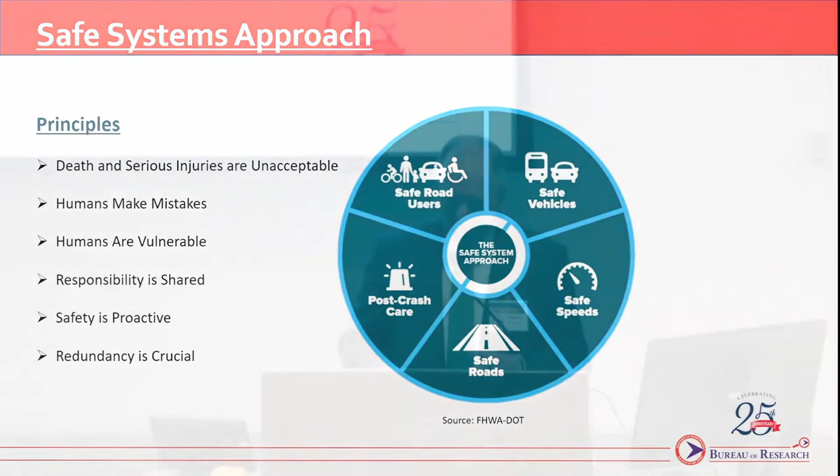So we can't just take one little segment of the pie and think that we're done. We need to work with other partners, and I think there's going to be some additional work going on with Dr. Curry. There's other work, and you'll see this as we proceed, how in safety we are not just sticking to the infrastructure side. There are now 5 E's that we have in safety: the traditional engineering side, education, enforcement, emergency response, and the 5th E is equity. So this is really, we have to look at all of these as we move forward with safety.

So the next piece here is I want to talk a little bit about how our federal highway safety improvement program has evolved to meet our challenges. So if we go back 10, 15 years ago, we were having some difficulty in authorizing enough of the HSIP money. What we've been able to do over the past few years is to really increase the diversity of the categories of the projects that we look at.

We are no longer just doing single hotspot projects. We have begun to look at systemic and systematic projects where we can use our data to identify multiple areas, multiple locations that share the same characteristics and apply similar treatments to them.

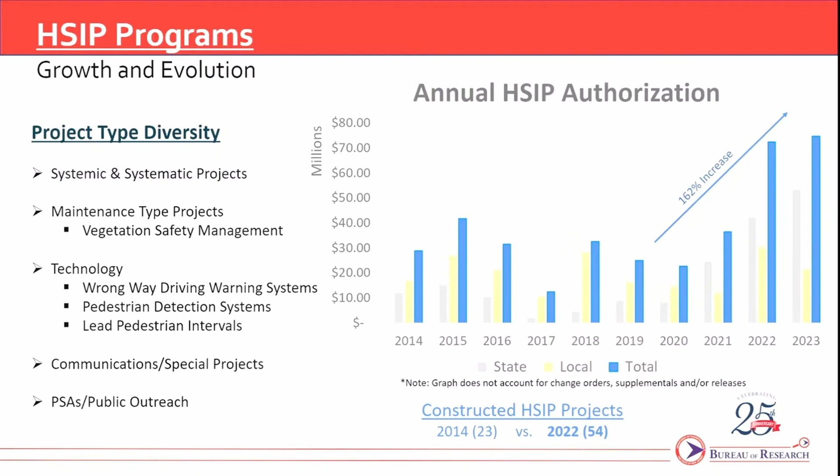In terms of systematic and systemic projects, we're spending more time on these because it's a more proactive approach. On the systematic side, we're doing centerline rumble strips, vegetation safety management, and also looking at mid-block crosswalk improvements. Every approved mid-block crosswalk, we're looking to make improvements there.

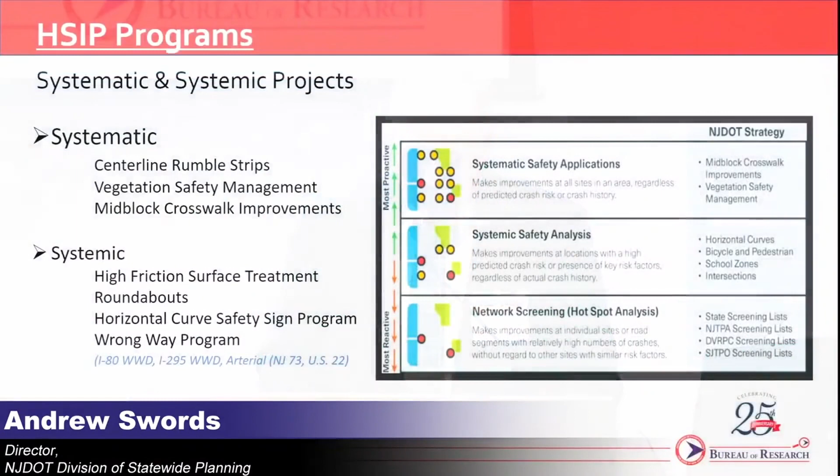In addition, on the systemic side, there's high friction surface treatment, which is very helpful. Roundabouts are one of the proven safety countermeasures from Federal Highway. We have a horizontal curve safety sign program and a wrong-way program. So again, we're moving beyond just solving hotspot problems at specific locations. We still do that, but we also have to move beyond that into systemic and systematic improvements.

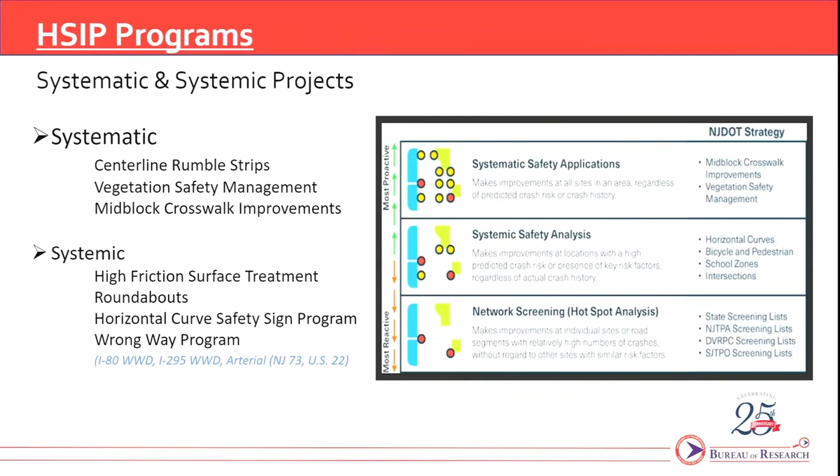I want to talk a little about our focus areas moving forward, because one thing we learned in safety is we cannot rest on our laurels. Even if the signs show we're getting better, we cannot count on that continuing without a comprehensive, thorough, and committed approach to move forward.

In addition, protecting vulnerable users is a key feature of our work. It was anyway, but now we're also doing a vulnerable road user assessment that we're providing to Federal Highway, and that's going to be a cornerstone of our work moving forward.

Our ongoing work with partners is critical. This came up at the Safety Summit yesterday, and it will be everything we do with partners at the federal level, the state side, our metropolitan planning organizations, and our transportation management associations, the TMAs. They're boots on the ground for Safe Routes to School and a lot of other work. Also, the DOT Local Aid Resource Center is really important because it connects to all our counties and municipalities, critical partners since they own a lot of the roadways in New Jersey.

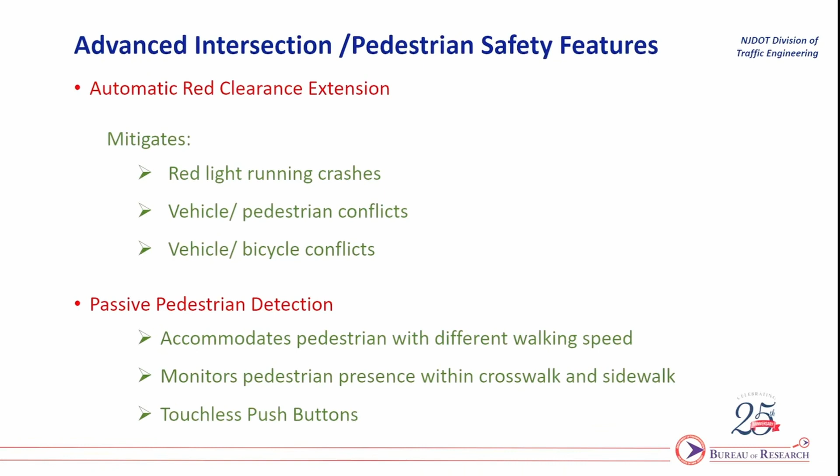The second feature I'll be presenting is passive pedestrian detection. This feature accommodates pedestrians with different walking speeds, and monitors pedestrian presence within crosswalks and sidewalks. I'm pretty sure everyone is aware of the touchless button that was installed during the COVID era.

Before I get into this red light extension feature, it's important to know how severe this issue is across our nation. The statistics from 2021: we had almost 127,000 injuries, and about 1,100 fatalities. That's like 3 fatalities a day. That's a big number.

This is the basic setup for our red clearance, I mean the automatic red clearance extension. What you see in the red zone is the detection area, and what you see in yellow is also an advanced detection area at the intersection.

As we all know, most of our traffic signal crashes occur in this red zone at a signalized intersection. The core issue is why do we have those accidents? We have all the technology in the world at this time, and we're still having 3 fatalities a day.

We took a very different approach. Of course, there is advancement in technology, but we took a little different angle. We believe, along with our engineers, that the core issue is the common arrival time in this red zone. So what this feature engages and does is it changes the arrival of the two conflicting movements during that phase.

Regarding the yellow extension, which we call advanced detection, what it does is use forward-fire radar systems. It picks up the speed of the vehicle and calculates the stopping distance of that vehicle. Once we know the stopping distance is beyond the stop bar or beyond the intersection, we know this vehicle is not going to stop, it will blow the light. This feature delays the side street, which is the conflicting movement, for a few more seconds to let this vehicle cross.

So we prepared two videos in our office that would explain further how this operation works. Let's see.

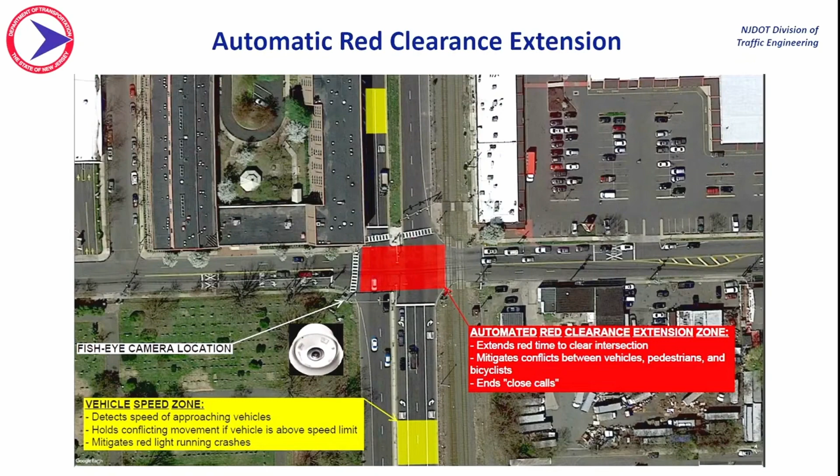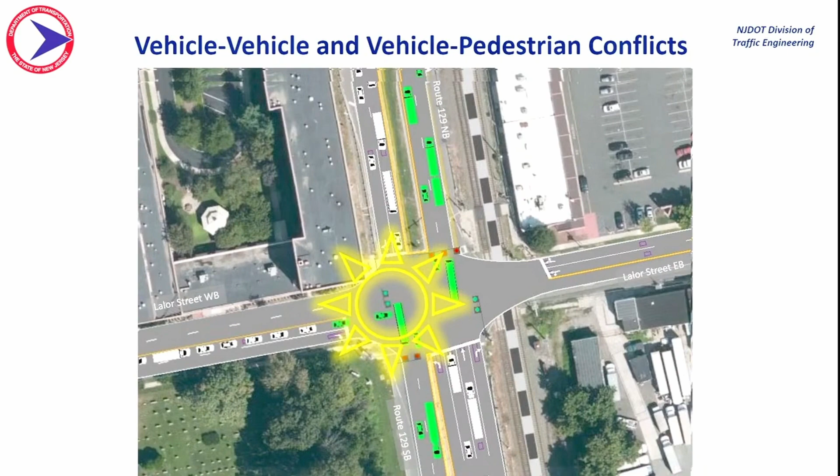Notice the green signal for Route 129 and the red signal for Lalor Street. Traffic is flowing normally along Route 129. Route 129 is about to receive the yellow light. The red light will appear in about 4 seconds.

However, a southbound vehicle is about to run the red light. Follow the arrows that will appear in the upper part of the map.

All approaches see a red signal for a set amount of time, which is normal operation in this instance. Notice the vehicle running the red light. This time, due to the automatic red clearance extension feature, all signals are displaying red until the vehicle has completely cleared the intersection.

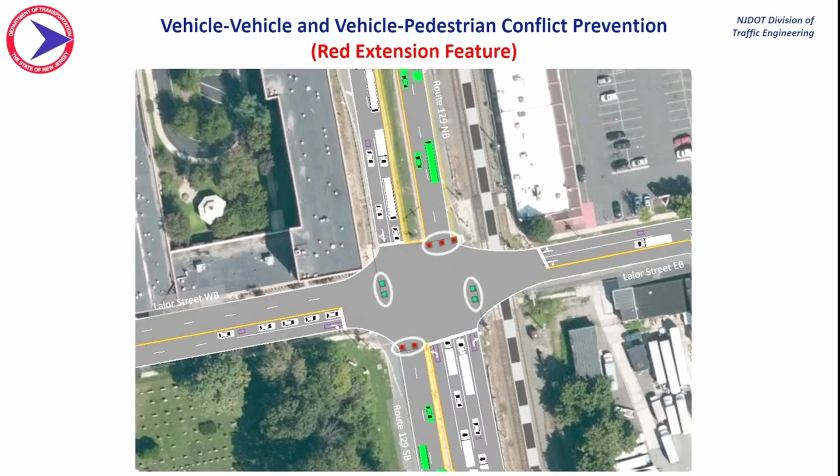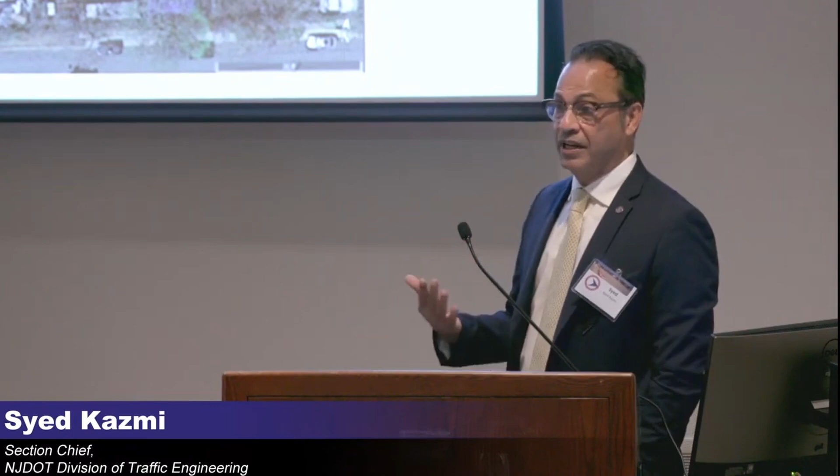So this is the basic operation for the red light running extension feature. And the red zone that you saw also provides a second layer of safety, redundancy. So if there is a vehicle at the end of any permissive phase, or maybe a late arrival at the intersection, or maybe a bicyclist, it can extend or hold conflicting movement for a few more seconds to make sure. The goal here is to clear the box before any conflicting movement.

Okay, this is the second feature that I'm going to present. This is a passive pedestrian detection system. What you see in the purple is the waiting zone. It's all detected by a 360-degree camera, and it detects the pedestrians by direction. It's not like somebody is going away from the intersection. It detects the pedestrian by direction and places the call for it.

A push button at this time is basically redundant. It has no meaning, but we keep the push button in for compliance reasons and also for reassurance, and also if there is any issue with the detection system, buttons are still available. And they are also touchless buttons.

What you see here is Route 129 Lalor Street. What you see in the green is the crosswalk area. This has also been detected. In this zone, in the green zone, we monitor the speed of the pedestrians. For some reason, if the pedestrian cannot finish their journey, it extends time for them.

It holds the conflicting movement for another few seconds. Of course, it's a predetermined time. It's not like someone can stand in the crosswalk forever, but that's a predetermined time, and that can also extend the time for crosswalks, so the conflicting movement won't start.

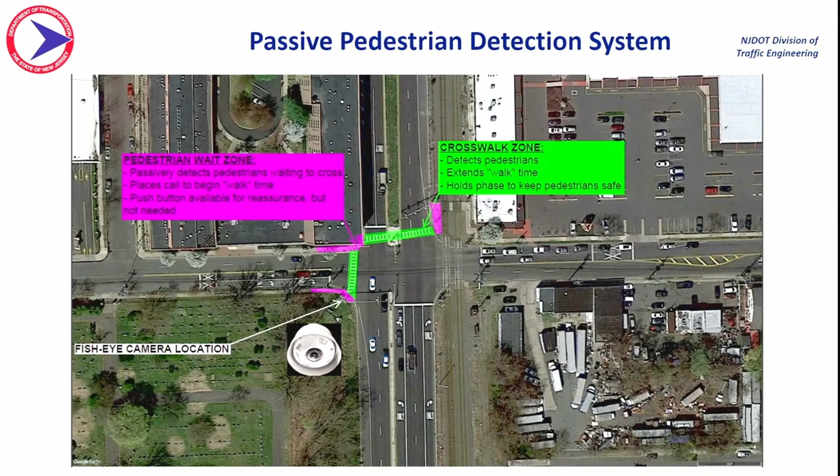We assume that everybody is going to use the push button. We install the push button. We have 3.5 feet per second for every pedestrian in the United States. So what this feature does is it basically compensates for those assumptions.

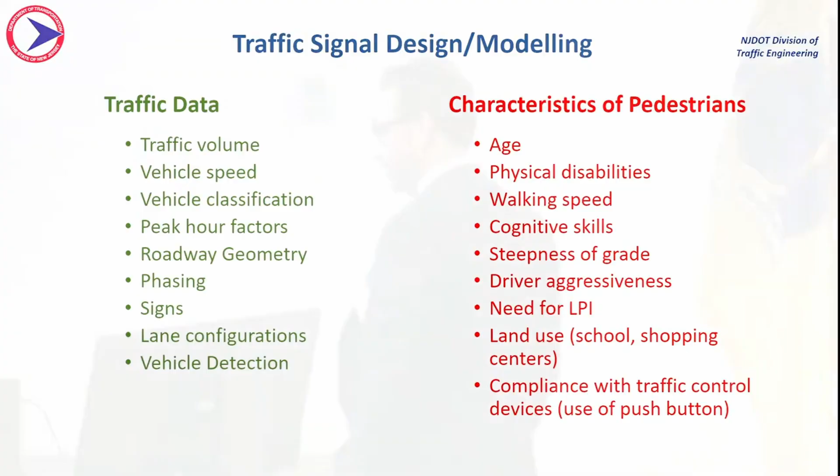When we got onto 129 Lalor Street, we have a senior citizen facility on one side. We have low income housing on one side. We have a light rail on the other side, and we have a lot of retail on the other side. I can walk 6 feet per second, but we have noticed mothers with strollers, 2 feet per second, 1 foot per second, and that's where this feature comes into play.

And in designing a traffic signal, I think these features are so important to be integrated into our traffic signal design. In the last 15 years, we have seen the eruption of all the adaptive systems, and we implemented them all over the United States. The goal for all the adaptive systems was to reduce travel time, having a bigger green bandwidth, and what do you call it?

Okay, so my time is almost over. So give me one more minute. I can take some cards.

So these features are extremely important to be integrated into our systems, and we are also in conversation with a lot of the adaptive vendors to integrate these features into the system. So in the future, you will probably see a lot more of this in traffic signal systems, and we will be incorporating these features. The rest of my speech will probably give you more information.

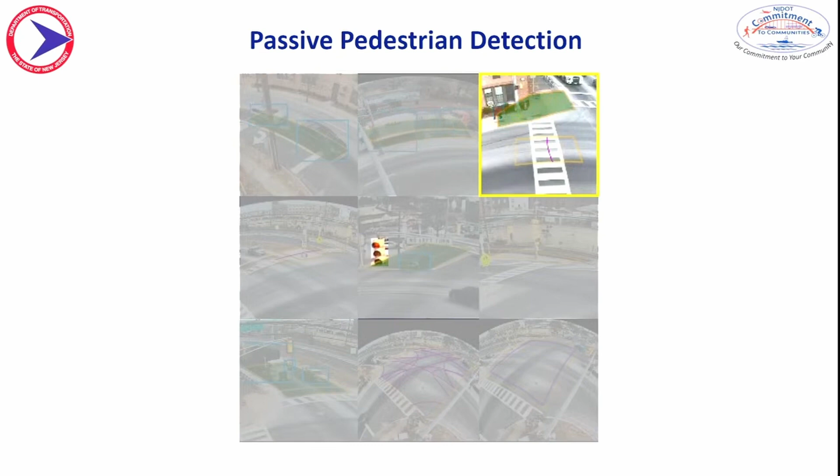There are some areas that operations addresses that affect safety. New Jersey DOT operations consist of the most visible day-to-day operations that the motoring public sees every day. The maintenance crews remove roadway debris, fill potholes, complete minor sign repairs, conduct safety service patrols for broken-down cars on high-speed roadways, and complete mowing operations.

Some of the areas that operations focuses on that really improve safety in the state is winter operations. As you know, winter is approaching. The operations team with private contractors are already prepared, having equipment and material ready and stockpiled to pre-treat roadways during a storm, clear the roadways, and salt the roadways to prevent icing and provide safe travel for the motoring public, even in the worst weather conditions.

The area I'm going to speak further about is the vegetation management program. It's a new program that operations has taken the lead on in coordination with various New Jersey Department of Transportation leads, utilizing HSIP funds that were talked about earlier. The program's intent is to reduce vehicle incidents off the roadway involving trees and vegetation.

Our unit also does priority construction projects. I'm not going to go too much in depth, but you see the types of projects we work on. These are on-call contractors that can report to an incident when it occurs, whether it's involving drainage, bridge, roadway, guide rail and attenuators getting hit, and as little as long-life pavement markings. If an area is requested for improved crosswalks and signage, we can get out there within a couple of days to improve an intersection when notified.

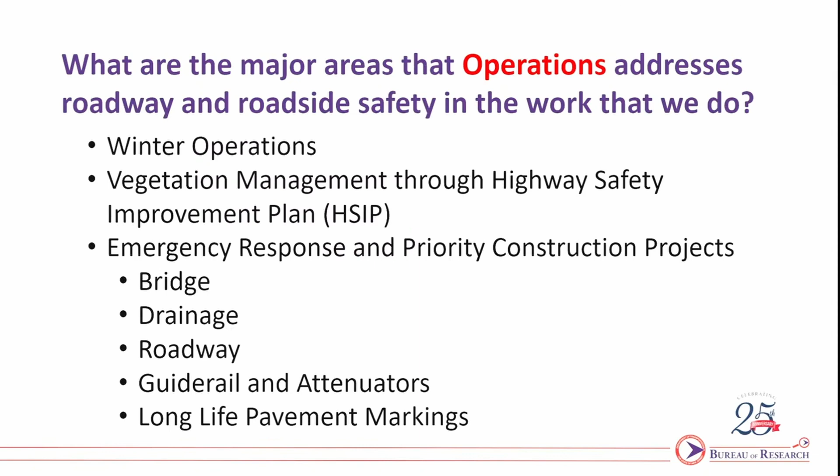Vegetation management—why are we focusing on it? On interstates and freeways, over a 10-year span, data was collected on our highways and freeways to understand how many accidents are occurring involving trees. Within that span, there were 5,162 crashes where a vehicle struck a tree.

In those crashes, there were 114 fatalities. The program is slated to utilize about $3 million per year to improve safety along the state's interstates and freeways. Brush and trees within about 35 feet of the travel lanes will be removed in order for vehicles to have a larger area to regain control.

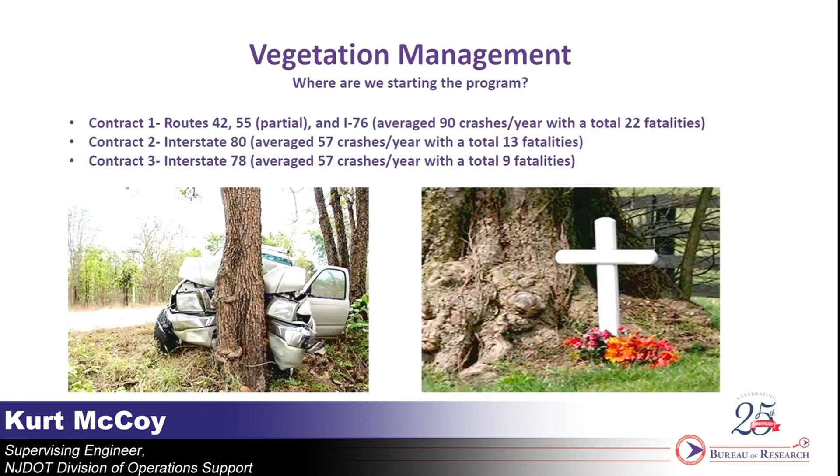Our unit was able to procure funding to begin 3 contracts focusing on vegetation management. The work will be done during the winter in order to comply with bat restrictions and to remove vegetation close to the roadways and dead trees that are outside of the roadway.

The first contract is going to be on Routes 42 and part of 55 and Interstate 76, which has an average of 90 crashes per year with a total of 22 fatalities over the 10 years.

Contract number 2 is on Interstate 80. It was averaging about 57 crashes per year with a total of 13 fatalities within the 10-year study.

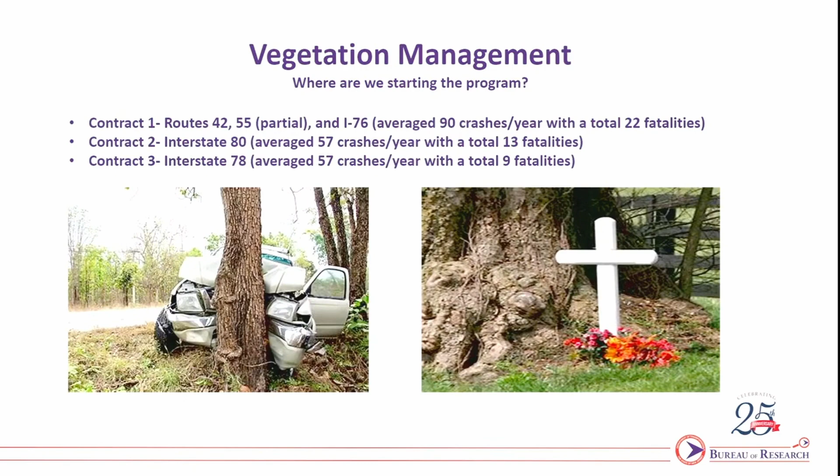Contract number 3 will be Interstate 78. Again, it's another 57 crashes per year, so it's just like Route 80, and there's a total of 9 fatalities.

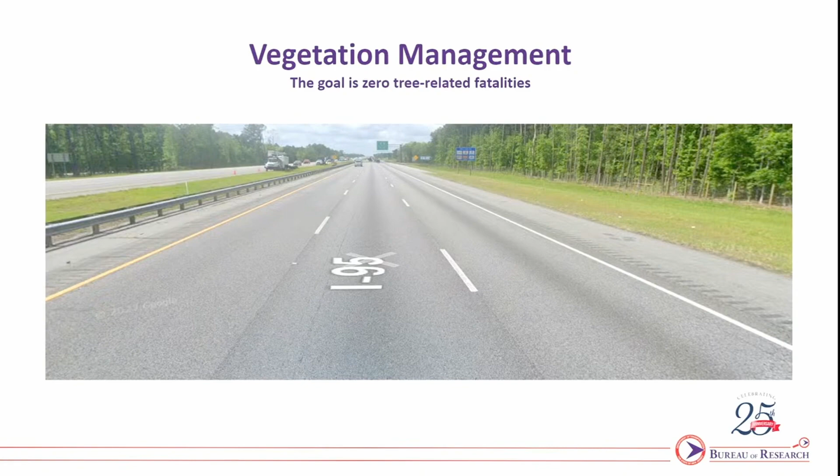So our overall goal is to get down to 0 tree-related fatalities. It's achievable, and it's a project that is very well suited for our operations maintenance groups. This program will take many years for the NJDOT to complete, and we are hoping that each year we will see the incidents, injuries, and fatalities fall until we get to 0.

And that's all for me. Thank you very much. How'd I do? Thank you, Kurt. You are our savior of the day.

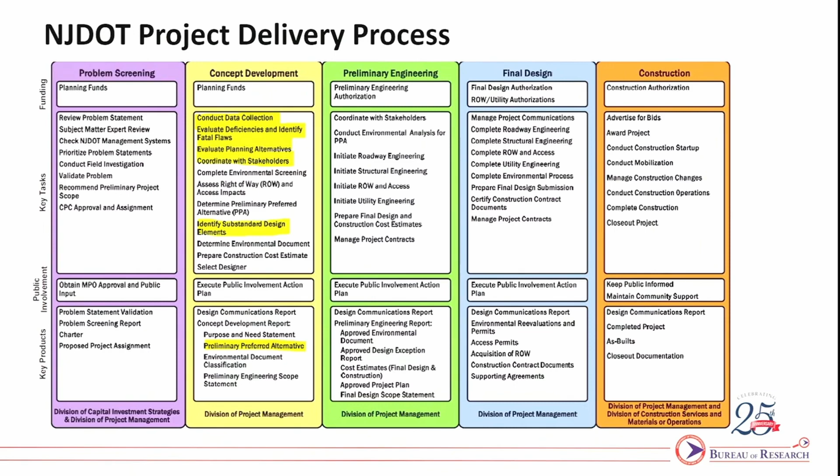These are the key safety-related activities we perform during concept development. The project team, including designers, NJDOT SMEs, and external stakeholders, review safety management data. The purpose is to see whether this project is ranked high on the SMS. The project team will review crash data, crash analysis, and crash diagrams.

Based on the analysis, the project team will identify substandard design elements to check whether they contribute to any crashes. Based on that analysis, the project team will identify feasible safety improvements and include them in the project.

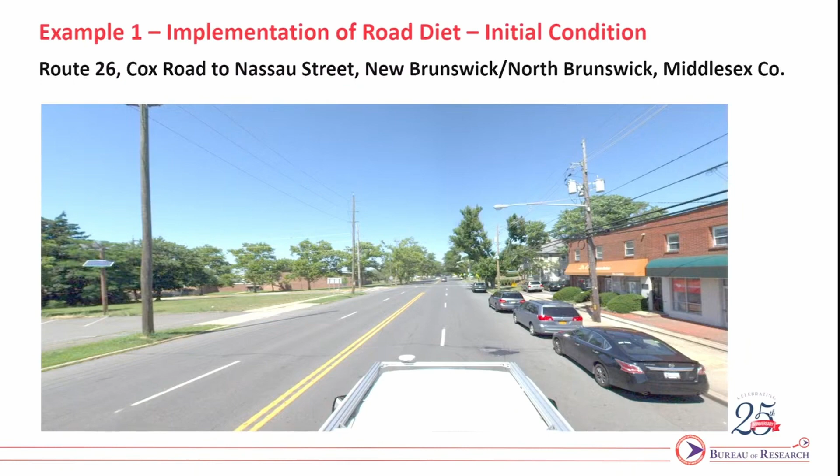Construction has been completed for the project. What you see in this photo shows the pre-construction condition. As you see, the roadway has a total of 4 travel lanes and on-street parking on either side.

Here is the post-construction condition. The 4 travel lanes were reduced to 3 travel lanes, and we added bicycle lanes to the road. The on-street parking was maintained.

So what are the key benefits? Turning movements can be accommodated via the center turning lane, and bicycle accommodation is included. This project is also consistent with the Livingston Avenue complete street project—Livingston Avenue is the extension of Route 26. So now we have extended the infrastructure for the bike lanes, and from this point onwards, bicyclists can ride up to downtown New Brunswick area.

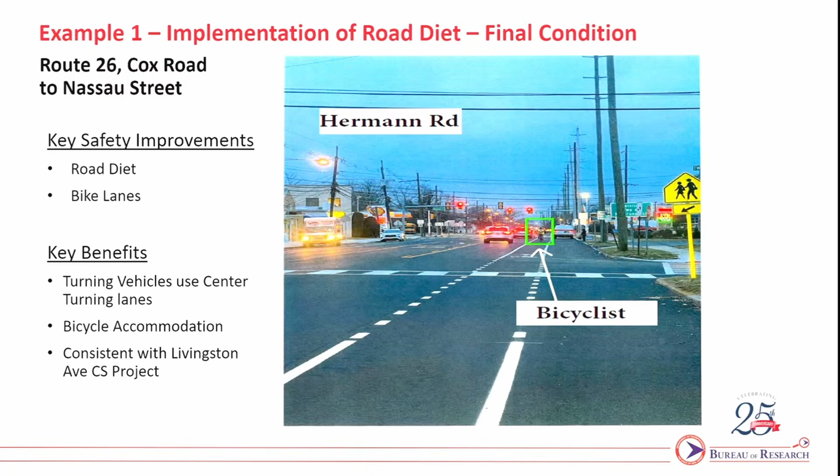Here is the second example: the construction of a roundabout. This will be constructed as part of the Route 66, Jumping Brook Road to Bowne Road, Wayside Road project, located in Neptune/Ocean Township, Monmouth County. This project is in final design, and construction is anticipated next year.

I'm going to go over some key improvements. We have incorporated several safety improvements as part of the project. The Route 66 section from Jumping Brook Road to Wayside Road will be widened from a 2-lane section to a 4-lane section to accommodate the operations.

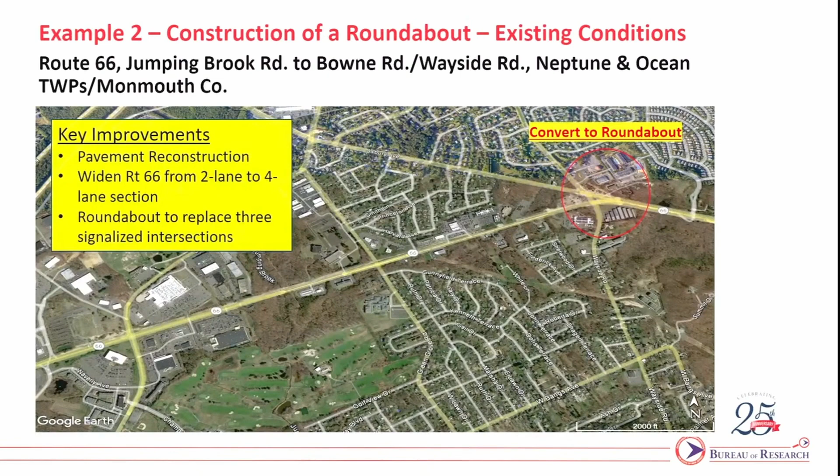A roundabout will be constructed at the east end of the project. As you can see, there are 5 approaches to that intersection—3 signalized intersections clustered together. So the project team came up with the roundabout design for that location.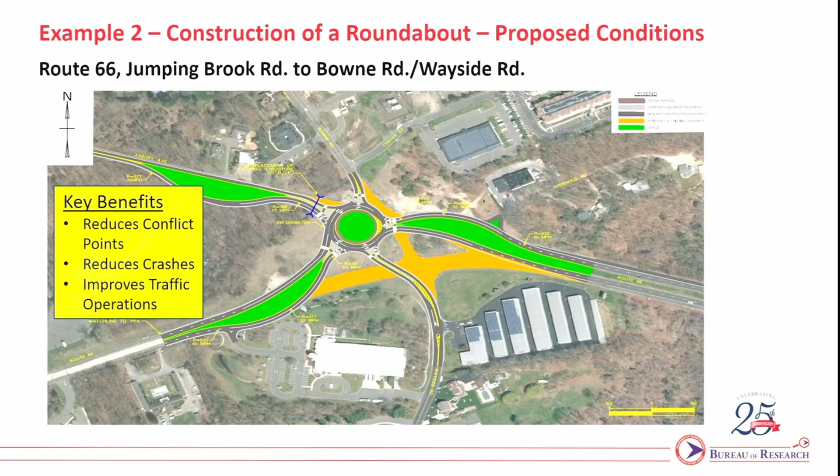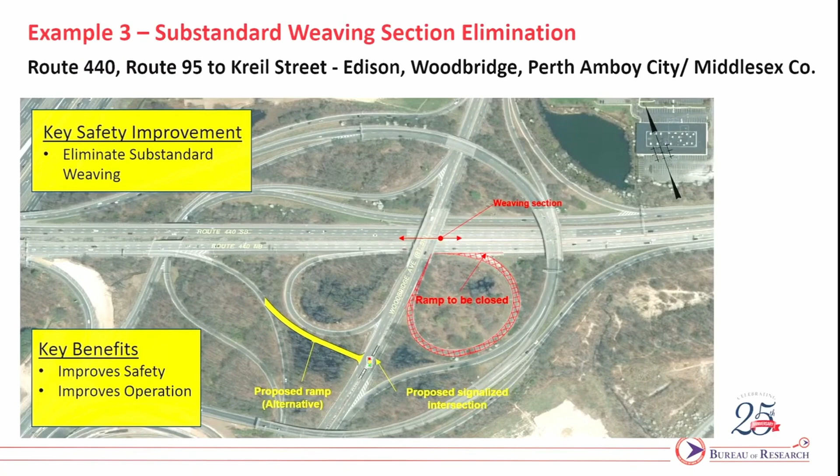Example 3. This is to highlight the substandard weaving section elimination on Route 440 in the vicinity of Woodbridge Avenue. This project is a Route 440, Route 95 to Kreil Street pavement reconstruction project, located in Edison, Woodbridge, Perth Amboy City area, Middlesex County.

This weaving section is very short, about 200 feet between the on-ramp and the off-ramp, creating traffic turbulence and resulting in crashes. As part of the project, that weaving section will be eliminated by eliminating that loop ramp.

That move will be accommodated by this new connection, this roadway. This off-ramp move will be accommodated via this intersection, and the vehicles have to come here and make a left turn.

So what are the key benefits here? It improves safety, and also it improves operation in the vicinity of the area.

Example 4, mid-block crosswalk improvements. The purpose of the project is to improve safety at the existing 37 mid-block crosswalk locations in Central Region. This project is at the tail end of the limited scope CD. At these locations, we are looking at installation of RRFBs, hybrid signals, traffic signals, and improved signing.

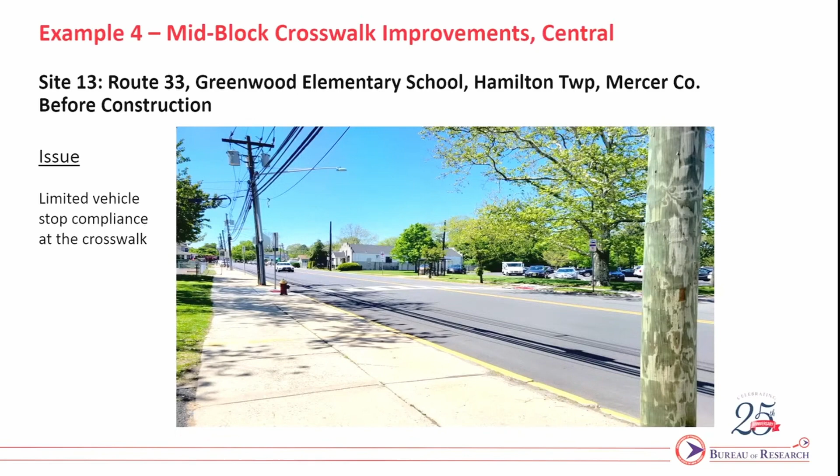And striping. When we were doing the project meetings with the locals, site 16... let me go back. Site 13 is located in the vicinity of Greenwood Elementary School. When doing the public outreach, the Greenwood Elementary School wanted us to accelerate the improvements to the existing mid-block crosswalk, so we advanced the delivery of the project through a maintenance work order.

I'm going to show before and after conditions. So what you see is what is there now, and here it is what is proposed. Here you see the increased signage, we have additional signs, and the flashing beacons here, rectangular rapid flashing beacons, and also here. We have added signage, and also prohibited parking in the vicinity, so the approaching vehicles would know the pedestrians are on the crosswalk.

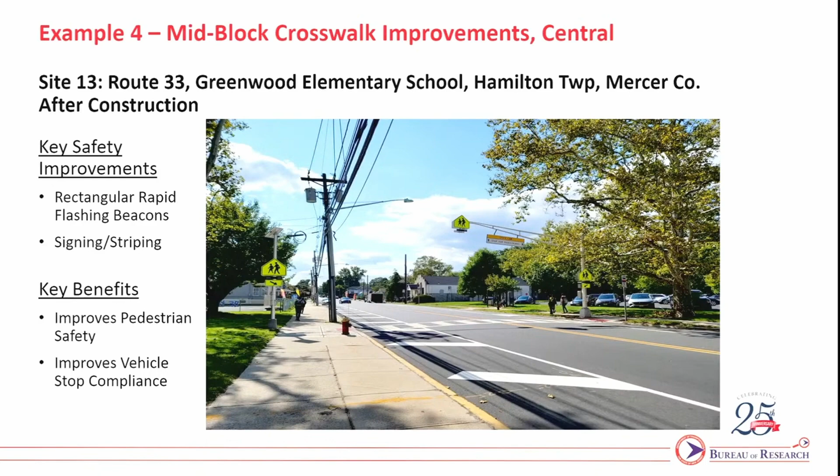So the issue is the vehicle stop compliance, and the anticipated key benefits here are that it improves pedestrian safety, and also it improves the vehicle stop compliance.

This is my last example, Example 5. This is the systemic backplate pilot program, central. This will be implemented on Route 27 in North Brunswick and South Brunswick townships, Middlesex County. The key safety improvement that we are proposing is to install traffic signal backplates with retroreflective border.

So what are the key benefits? That proposed backplates should improve the traffic signal visibility.

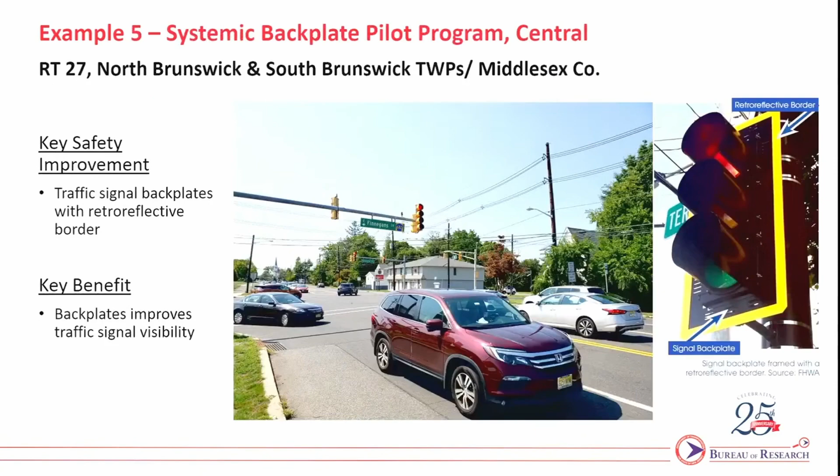I'm done. To conclude my presentation, I'd like to thank the project team that worked with me, including designers, DOT SMEs, and external stakeholders.

Excellent examples. Thank you, Vijay, very much. Outstanding, very good job.

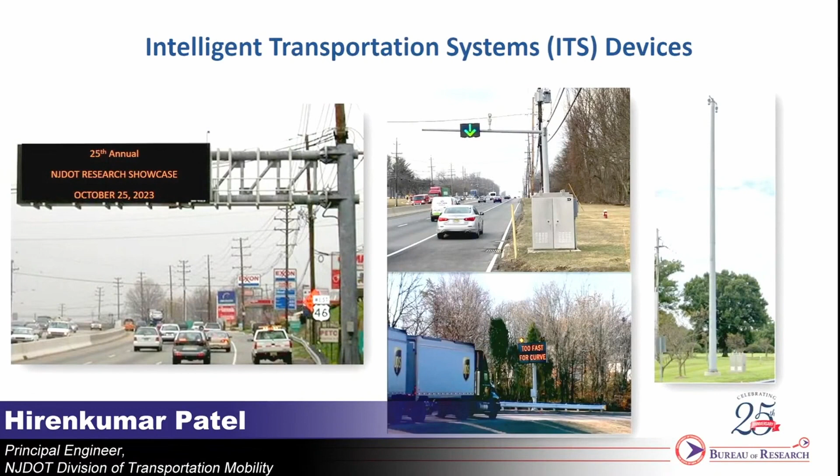These devices include the DMS, known as Dynamic Message Sign. This sign improves safety by providing warning messages related to congestion, crashes, incidents, construction, road closure, speed restriction, and weather conditions, etc. The other one on the list is the lane use control sign.

This is the latest one we installed on Route 1 hard shoulder. If you have driven on Route 1, you have seen this sign. This sign provides clear indications to motorists whether the shoulder is open or closed.

At the same time, it helps our traffic operations manage this hard shoulder dynamically. The third one is the camera surveillance system. It is a very helpful tool for our traffic operations to view traffic congestion in real time, and with the use of this camera they can display safety messages on DMS.

And when needed, they can dispatch a unit if there's an incident on the roadways. And lastly, a truck rollover warning system. The system warns a truck if it's entering the on-ramp at a higher speed than it's supposed to, and it is at risk of rolling over.

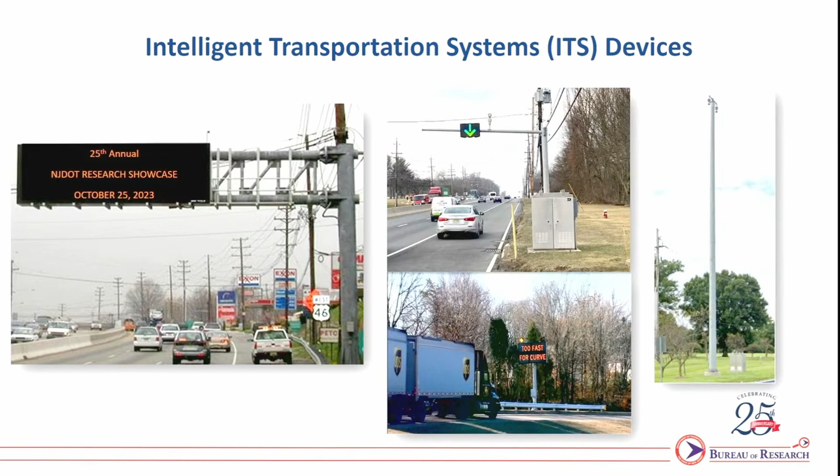So other than our traditional ITS devices, we are currently working on implementing a wrong way driving detector system. So why wrong way driving system? FHWA estimates that on average 360 people are killed each year due to wrong way driving crashes.

They don't really happen that often, but the severity is quite higher. In New Jersey, on average, there are 107 wrong way driving crashes each year. So what we're doing here is deploying a technology-based solution which not only detects the driver, but also alerts the driver at the same time.

It also alerts the TMC, so we'll know what's going on the ramps. I'll talk more in detail about how this system works.

With the wrong way driver, there's always a concern: how do we protect or alert this driver? So what we're doing is working with Cisco, which will help us display a real-time message on DMS that can alert drivers of a potential wrong way driver coming towards them.

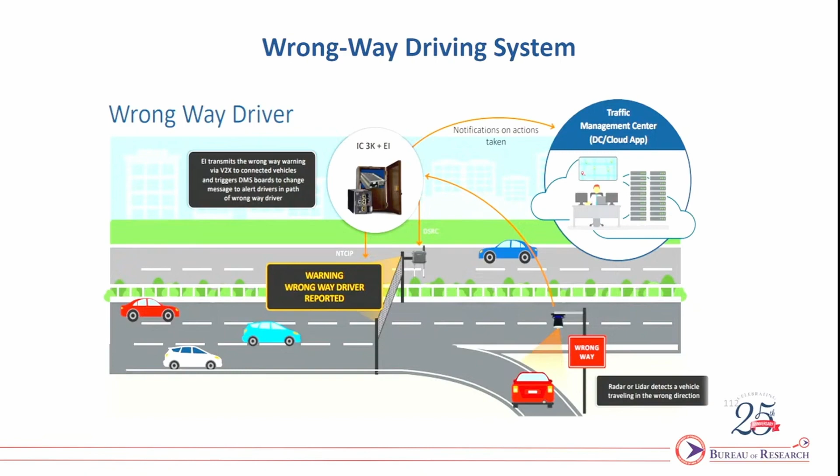Each wrong way driving site has a connected vehicle equipment named a roadside unit. When the wrong way driving incident occurs, the roadside unit sends out a traveler information message. Vehicles equipped with an OBU will receive the message, alerting them of a potential wrong way driver coming towards them.

So these are the system components. On top, we are using a thermal detection camera which detects any wrong way driving movement. At the bottom are the Axis high-def cameras, which help us record any wrong way driving incidents if there is any, and LED illuminators, which turn on when the wrong way driver is detected.

It's a very helpful tool at nighttime, and it helps the camera record the event as well. And lastly, the legend sign, which starts blinking when the wrong way driver is detected.

There are 3 zones of the system. The first one is the alert zone. As soon as the driver is in the alert zone, all 4 signs will start blinking, alerting the driver that he's going the wrong way.

The second one is the correction zone. This zone gives the driver an opportunity to self-correct and go back to the correct movement of traffic. And lastly, if the driver keeps going through the confirmation zone, the system will send a message to the TMC via text or email, and to all of the stakeholders that we listed.

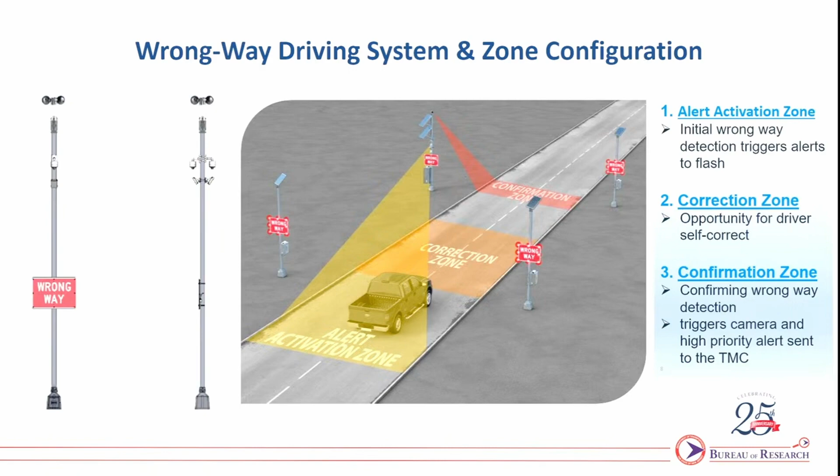Currently, we are working on the statewide wrong way driving CONOPS, which will help us tackle any wrong way driving system events.

These are our initial deployment sites for wrong way driving. In total, we deployed 11 wrong way driving sites: 5 of them are on Route 1, and 6 of them are on 295.

NJDOT applied for a US DOT SMART grant for implementing smart sensors for mitigating wrong way driving events in New Jersey. We won for stage 1, and currently we are working on stage 1, phase 1.

We are working very closely with Chivan and Dan to develop a toolkit which will help us screen for potential wrong way driving sites. We'll be meeting various vendors to implement 2 sites for now, and for validation and verification purposes, we'll be working with Dr. Jalkar and his team from Rowan University as well.

There's a stage 2 of this grant. We will be applying for stage 2, which is a larger part of this grant, which will help us deploy more and more sites within New Jersey.

So other than wrong way driving, we are currently working on our initiatives for connected vehicles. We started learning about this technology back in 2020.

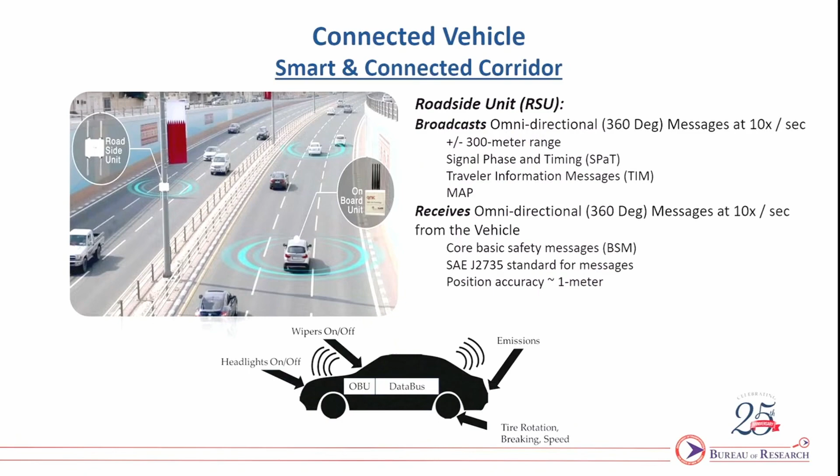This device transmits and receives messages 10 times per second. With the use of this communication between these two devices, we can run various safety and mobility applications such as red light violation warning, reduced speed work zone warning, spot weather information warning, and pedestrian safety warning. We can even do V2V applications such as forward collision warning and blind spot warning.

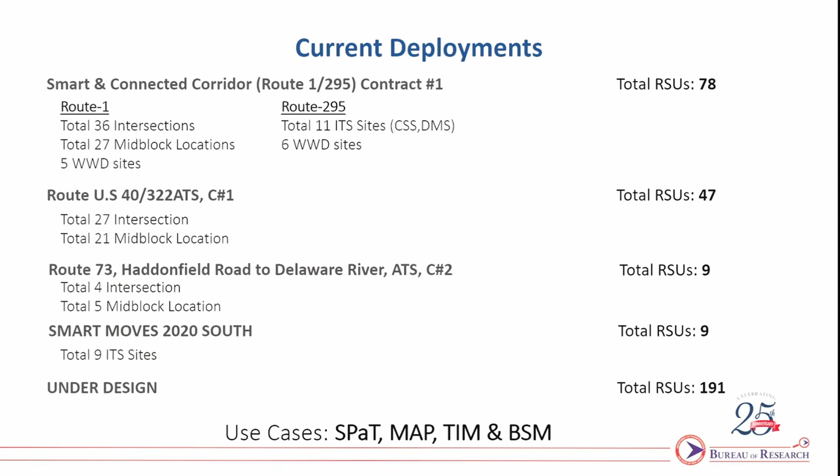These are the recent construction projects where we installed a roadside unit. In total, we installed 143 physical RSUs. There are 191 in design, which will be installed in the near future. Currently, we are just focusing on transmitting SPAT, MAP, and TIM, and receiving BSM from the roadways.

Just the field installation pictures from our recent construction project. The RSU right here is installed on a traffic signal pole. This one is the RSU installed on our camera signal pole. These red placements you see are the locations of the physical RSUs we've installed so far in New Jersey.

We are currently working with Verizon and Cisco to learn about the virtual RSU. What a virtual RSU means is we don't need this physical RSU in the field. All the roadside information is sent to the Verizon Cloud, and that information is converted back and sent back to the roadways.

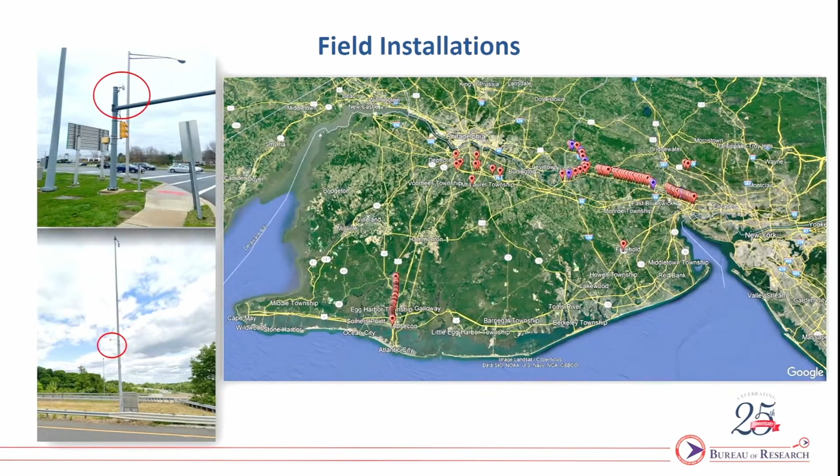Dr. Jean from Rutgers is currently working actively with our Cisco partner, and Dr. Benesla and his team. We are looking forward to learning what NJIT is doing for virtual RSU as well. That's what I have. I'm done. Thank you for your time.

I find ITS fascinating, and I'll tell you, it's all about communication, and what they're doing is just unbelievable. All right. Thank you, Hiran Kumar.

I'm now going to ask the panel a series of transportation safety questions. Question number one: how does NJDOT engage with the community and gather feedback on safety concerns and suggestions for improvement?

To start us off, it'll be Section Chief Kazmi. Okay, can you guys hear me?